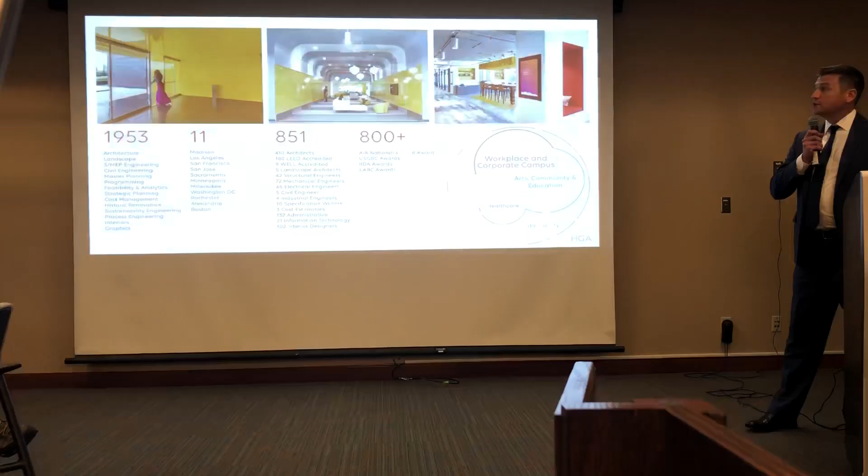Quickly, a little bit about HGA. We are a full-service architecture and engineering firm. We're headquartered in Minneapolis, founded in 1953. Our second office was in the Milwaukee area, and we're the second largest of our offices. Overall, as a firm, we have about 850 people, 200 of those located in the Milwaukee office.

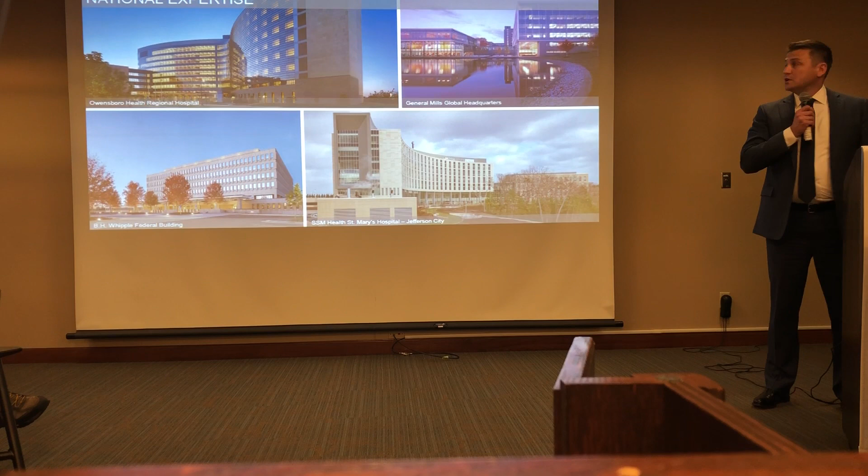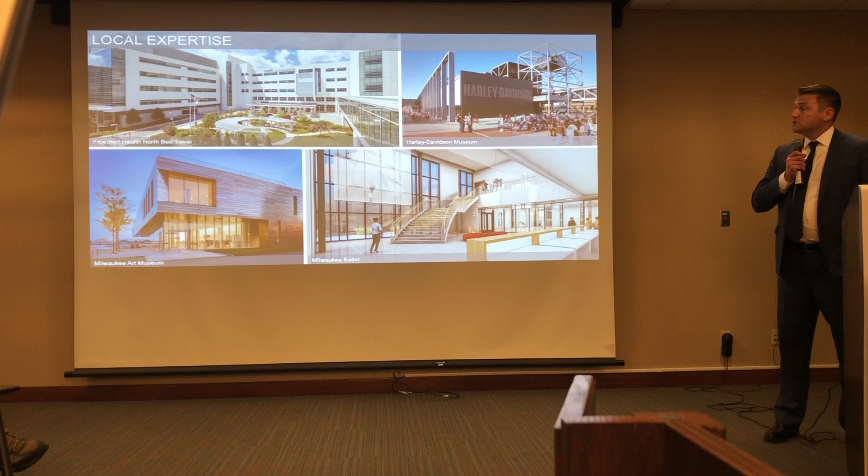We work on a variety of different projects. At the national level, we specialize in large, complex buildings that vary from hospitals to headquarters to federal buildings. We also do a lot of work in the local area. Some of these buildings you're probably familiar with: the Froedtert, the Harley-Davidson Museum, the Art Museum, and currently working also on the ballet.

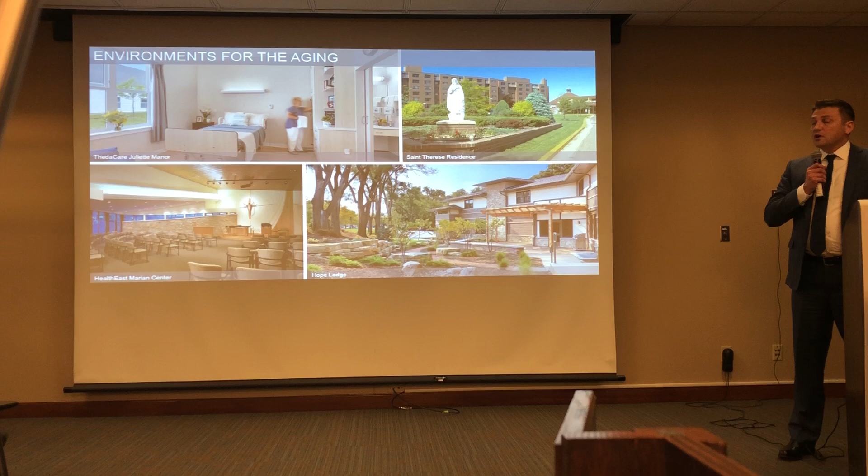We do a lot for environment of aging. That's one of our areas of expertise and why we're attracted and drawn to this project, and one of the things that we bring to it as a team.

And I'm with Gilbane Building Company, founded back in 1873, right here locally. I've been with Gilbane for 30 years now. Part of a large building company that services clients across the entire globe, over 2,700 employees, always within the top 5 builders in the entire United States.

But what we're most proud of is everything we do here locally. Over the past 30 years, we've had the opportunity to work on so many exciting projects, and couldn't be more excited to be here at St. Camillus talking about this project and some of the awesome things that are going to happen here on campus.

We've been involved with Schreiber Foods and the largest state-owned office building in Madison, Wisconsin that was just completed. We just completed Northwestern Mutual's new headquarters in downtown Milwaukee, so we've got the chops to do this 500,000 square foot addition here to the St. Camillus campus.

So speaking briefly at a very high level with the overall project schedule right now, HGA is going to get into the design, but some of the things that are happening behind the scenes in addition to the design work is what we call the enabling or make ready work.

As part of the project, we will be tearing down the old Cordes building. The Cordes building has a number of important infrastructure requirements currently located there that service the entire campus - items like gas that serves other areas of the campus, fiber which serves the phone system, security, things like that will need to be relocated as part of this enabling or make ready work, which will be going on over the next 4 to 5 months here.

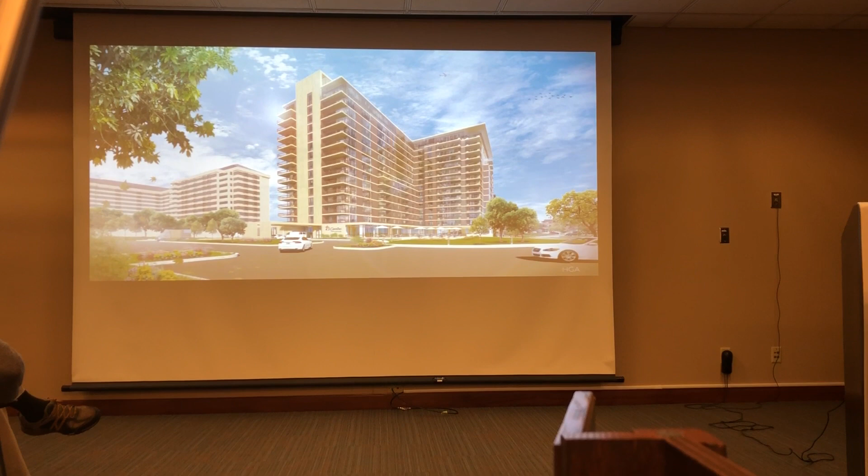Now for the design update. This is the current rendering - it's probably changed a bit from the last time you've seen it. We've updated the building to include 15 floors: first floor amenities, and then 14 floors of units above. We've retweaked the facade to align with some of the language and materials existing on the campus, and we've tried to push it in a little bit more of a modern, contemporary design.

So now into the amenities.

Fine arts with a theater and multi-purpose room to house a wide variety of events. The chapel, as I mentioned, brought up to the first level for more access and a little bit more room, and then wellness in the bottom corner with the pool and a fitness center.

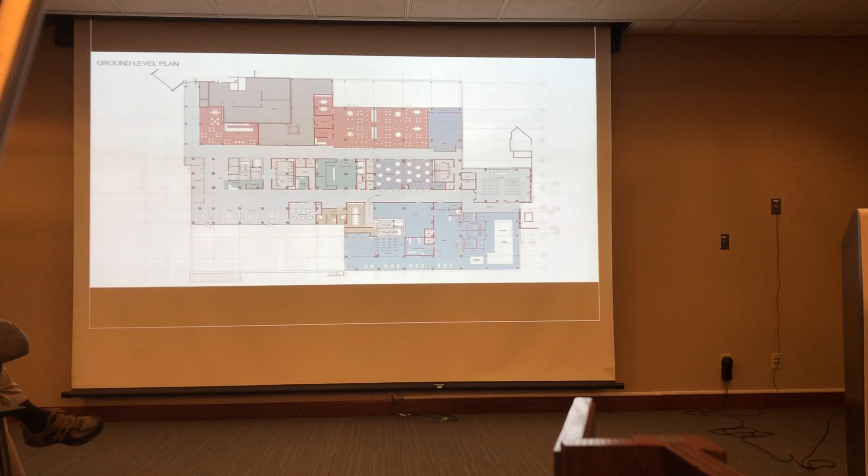And to tie everything together, there's a resident services area in the center of the building where the main elevator core is, where your mail, business center, and meeting room are all available. Now Kara will dive into some of the concept images for these spaces.

It's a really great community space where you can interact with people as they're coming and going. And then there's that connection to the outdoors.

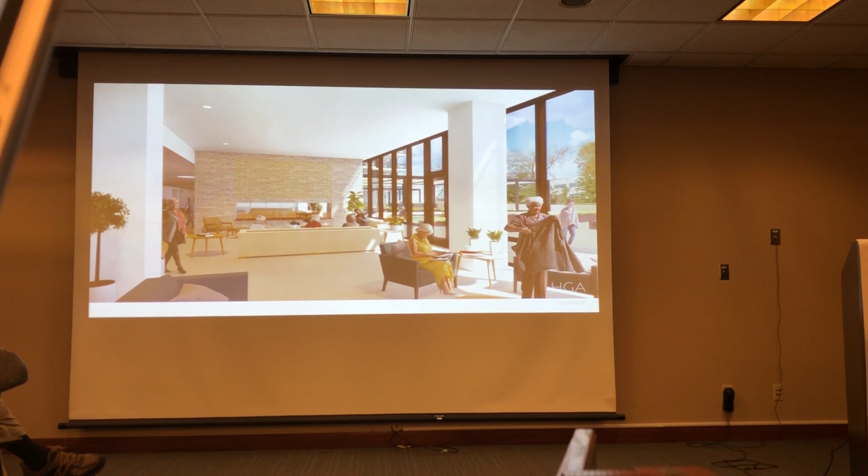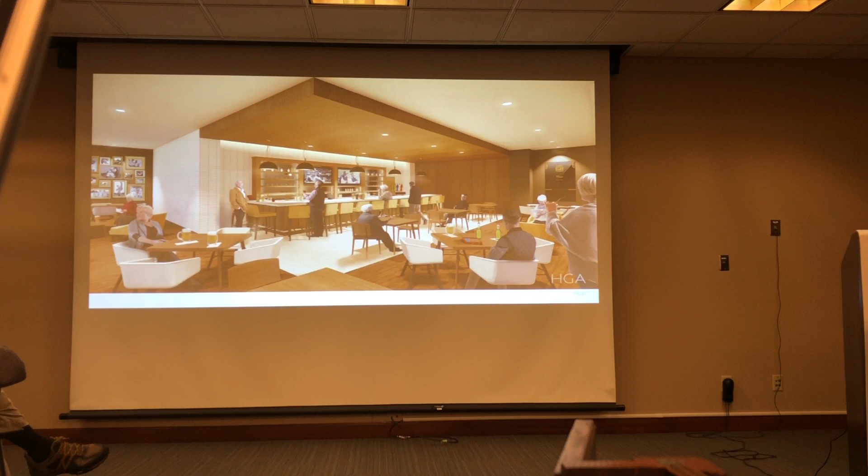Looking at the dining, again another community space that provides an elevated level of culinary experience where you can socialize with your neighbors, bring guests in, host, or have a family event.

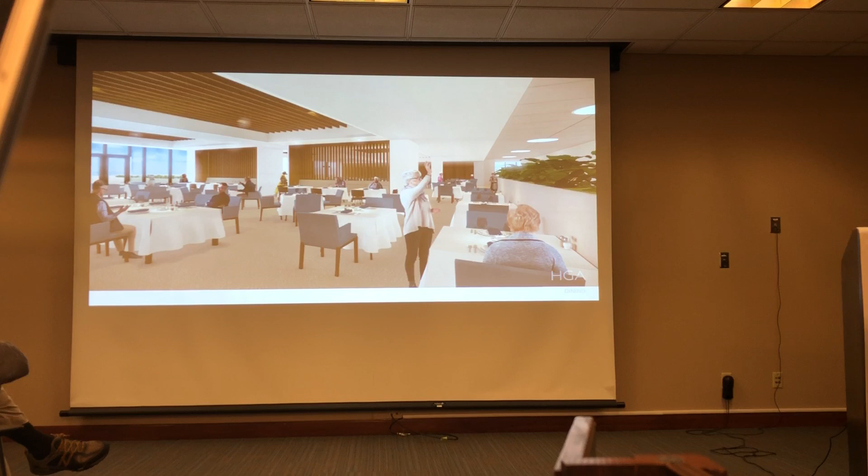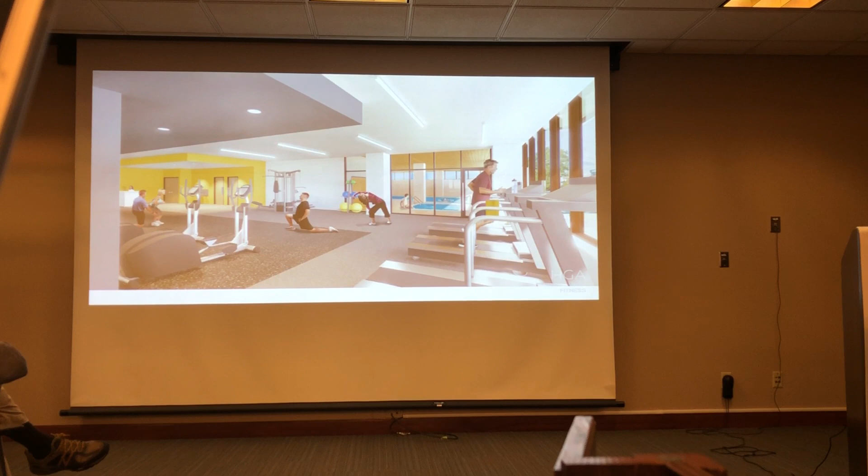And then looking at the fitness and the wellness, that's going to provide a variety of activity, including the machines, a pool room, and then an aerobics room for group activity.

So a little bit into the unit design, what we have is the typical tower plan, 12 units, a mixture of 2-bedroom and 1-bedroom units. There are 3 elevator cores housed along the circulation.

One with an elevator and stair to your upper left, and then a main elevator lobby in the center that would bring you up to your floor and usher you into a common space for the floor, and then an elevator and stair lobby to your lower right.

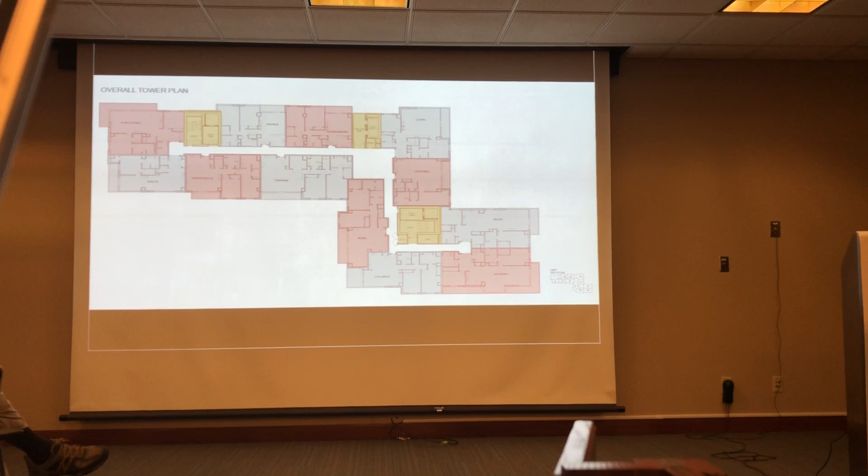We did some concept images for the units within the spaces, a wide variety, and Kara's got those as well. So we're highlighting some of the units. This is a range showing a flavor of some of the style of the units and giving you a variety of exterior options depending on the floor and unit you select.

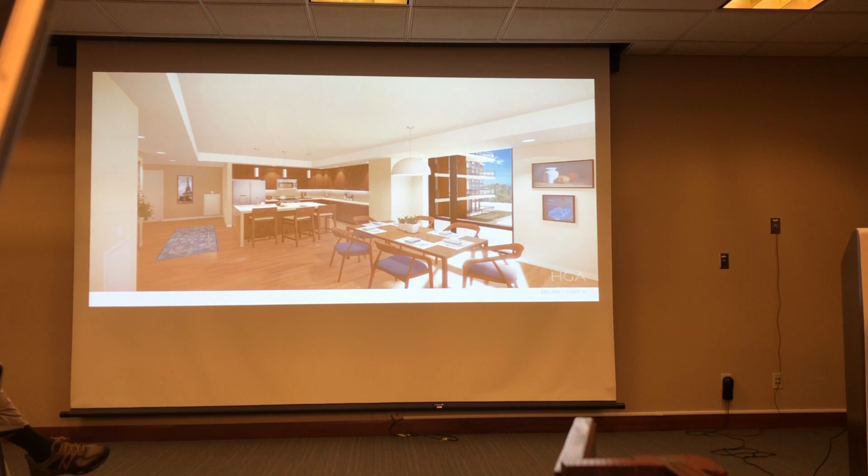So looking at some of the common spaces in the units like the kitchen and the dining room, moving into a master bedroom.

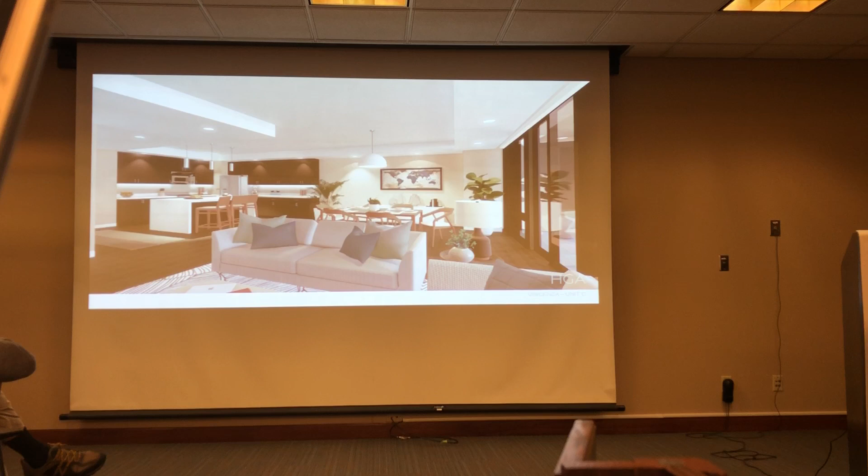Moving into another community space within the unit - your living room, dining room, and kitchen. You can start to see the flavor of a palette, and you can start to place yourself in there with your own character for each of the units.

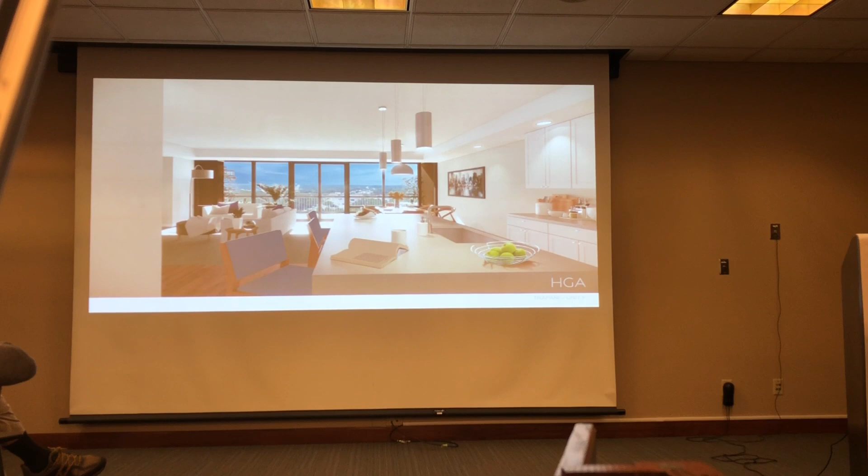Again, looking at another kitchen and living area, and seeing what you can see beyond that activity on the exterior from your balcony. Looking at another master bedroom.

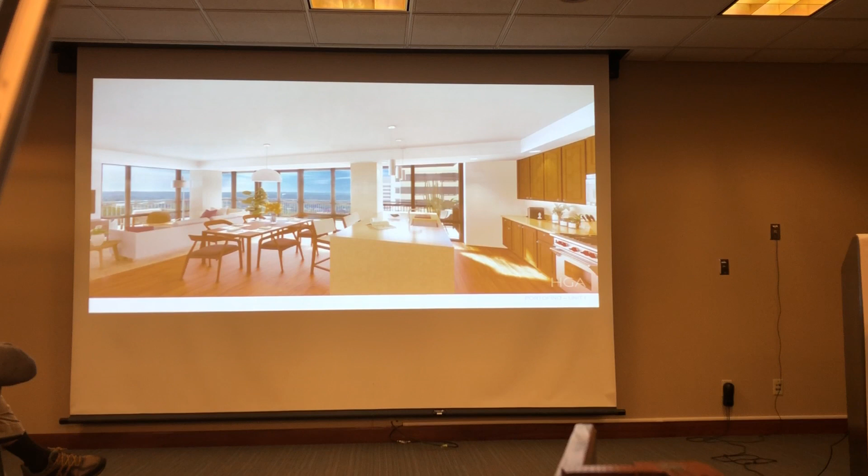Looking at a larger living room, dining room, and kitchen area. Yet again, another common living space in the unit. And then what that bathroom could look like in your unit.

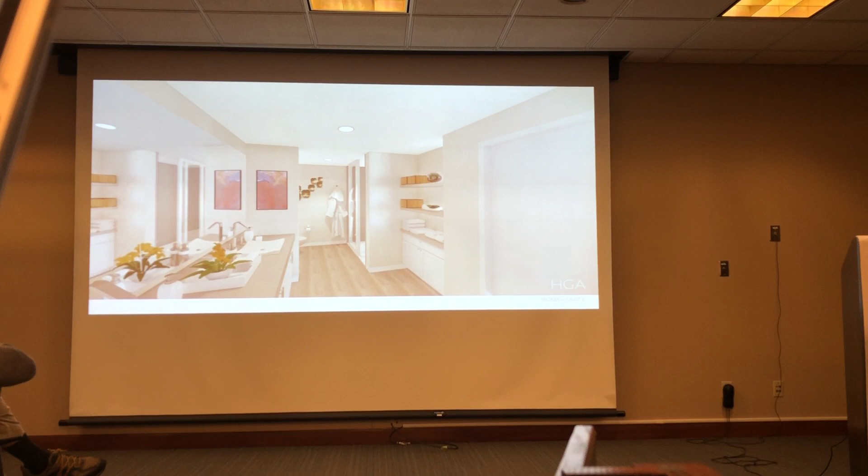So that was a very brief overview. I think we're turning it over to have some questions, but wanted to give a flavor of what the spaces would look like and where we're heading with the design.

Questions? In the past, we've seen a bunch of selections for interiors and all of that. I presume that still exists, so.

Yes, so in the design center there are 3 palettes - the modern, contemporary. So the question was about the palettes, so that everybody could hear the question, and what had been shown in the design centers. Thank you.

I'm trying to be a Vanna White. So yes, the 3 palettes are still there - the modern, the contemporary, and then the traditional. So you see in the unit renderings that there's a variety of palette options, so those still stand true.

Any other questions? Will the fireplace in the common area be gas or wood? Right now, it's being shown as a gas fireplace.

Is there any reason why it's taking so long to demolish that east building? John, are you around? Can you answer that?